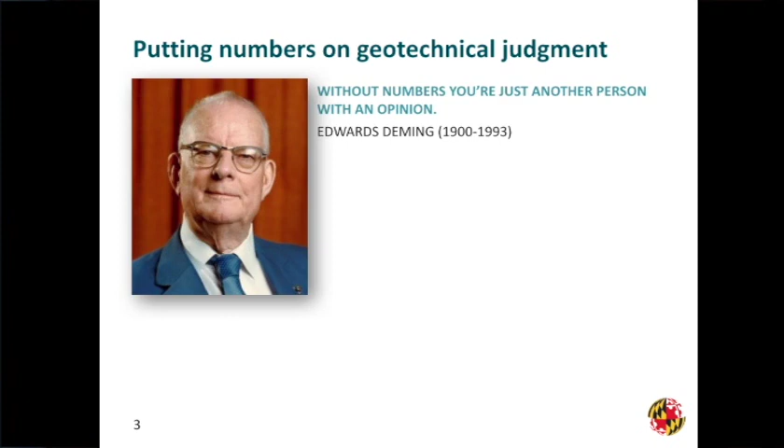It sort of led me to think about this topic. And when I think about engineering judgment, and it's the miracle of engineering judgment in our profession, most people talk about it qualitatively. But I love this quote from Edwards Deming: without numbers, you're just another person with an opinion. So my question this afternoon is, if we're going to put numbers on engineering judgment, how do we do it? How good are we at doing it? We've been trying to do this for about 50 years now, which is kind of astonishing, but we have. The question is, have we learned anything over this period of time? I'd like to take you through a series of little case history vignettes to make a few points, and I hope they will be of interest to you. I hope they'll be, in some cases, humorous, but also little nuggets to crystallize your thinking about this undertaking.

So, dam safety - many people in this room have been involved in dam safety. Rudy has, I have, a number of others. I like these quotes - this is from the IPCC, the Intergovernmental Panel on Climate Change. This is the UN-sponsored group that's been working on climate change modeling, and they come out with these sorts of statements. This is an Associated Press quote: they say that we can now say with extreme confidence that something, something, something. We can now call it extremely likely that something, something, something.

What do these terms mean? What does extremely likely mean? I was sitting this morning in the restaurant reading that greatest of all American newspapers, and it was talking about probability in jurisprudence - the question of admissibility of evidence and whether it had a likely probability of changing the verdict. What's a likely probability mean?

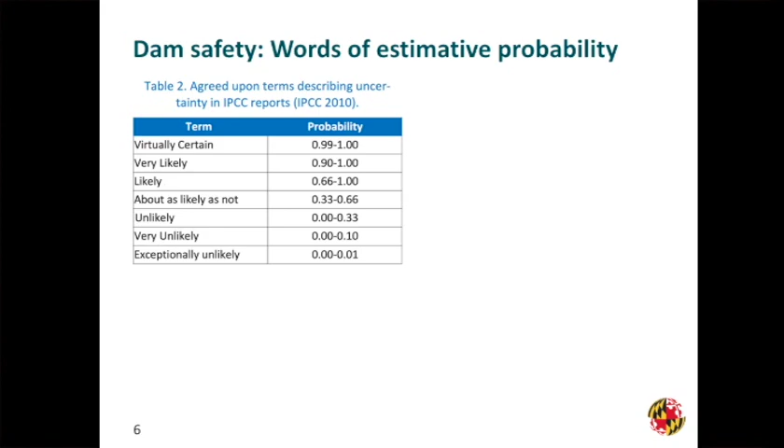Well, take a look at the first one, virtually certain. It's only an order of magnitude different, right? What's an order of magnitude among friends? But the Corps uses this as a sort of starting point.

These words come actually from this guy, Sherman Kent, who's relatively famous in the subjective probability business. He was a member of the OSS during the war, a professor of history at Yale after the war, and then the sort of senior intellect at the CIA for decades afterwards. Kind of makes you feel humble in your accomplishments.

He, for years, pushed the CIA and its intelligence analysts to not use adjectives but to use numbers when advising the president, or in the morning intelligence briefing they give to the cabinet and the president. This was only sort of successful - the agency analysts never really picked this up a lot. But in preparing this lecture, I noticed that as recently as 2015, the Office of the Director of National Intelligence, the DNI in Washington speak, issued an update to these words of estimative probability. So presumably the CIA is still following this direction.

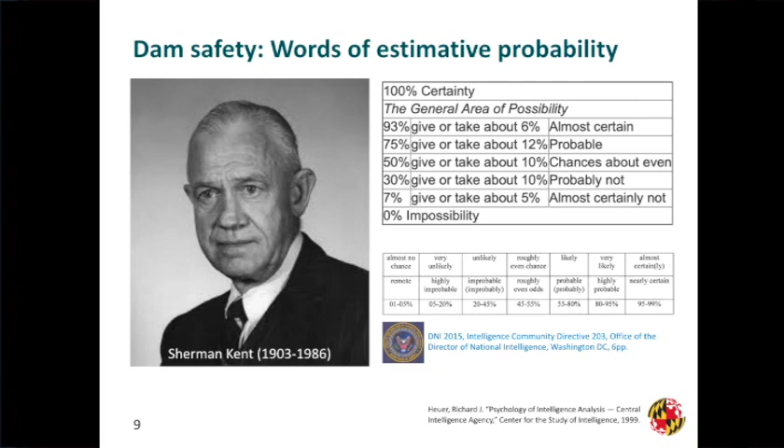Here is an interesting plot, and this has been replicated many times. This comes from the New England Journal of Medicine, but there have been a bunch of others. The vertical axis shows various adjectives and some adverbs describing the likelihood of events, and along the horizontal axis are the corresponding probabilities. There's a general trend, and if you read through the words, it sort of makes sense that they'd have this increasing trend.

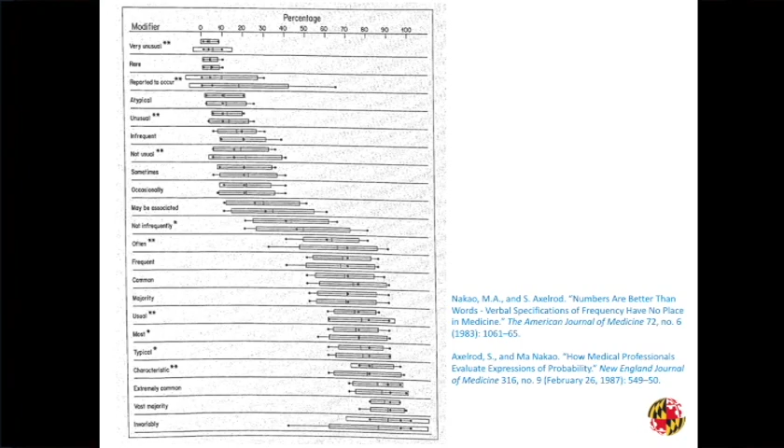What is more noteworthy, though, are the big black bars - those are plus or minus one standard deviation from the median, and the dots are the ranges. You can see that for some of these terms, there are 30, 40% differences in what people mean by them. It turns out most of us are relatively consistent in how we use these terms, but across different people, we're not consistent at all.

So I've created these blue slides which summarize what I think we've learned from each of these examples. This is the example from dam safety. You probably know the Gary Larson cartoon over there, but this is such an appropriate cartoon for what we've learned about words of estimative probabilities.

The adjectives are really poor substitutes for numbers - that's the first thing we've learned. They mean different things to different people, sometimes quite different. They mean different things to the same people in different situations. They mean different things to experts and to other stakeholders. And they mean different things to dogs and to dog owners. We also learned that we should avoid what's called, the term of art, weasel words - and these are they.

It turns out that these words tend to add more confusion to communication than they add clarity. So in our presentations and reports, we should tend to avoid these kinds of words because they may cause more problems than they solve. So that's what we've learned about WEPs.

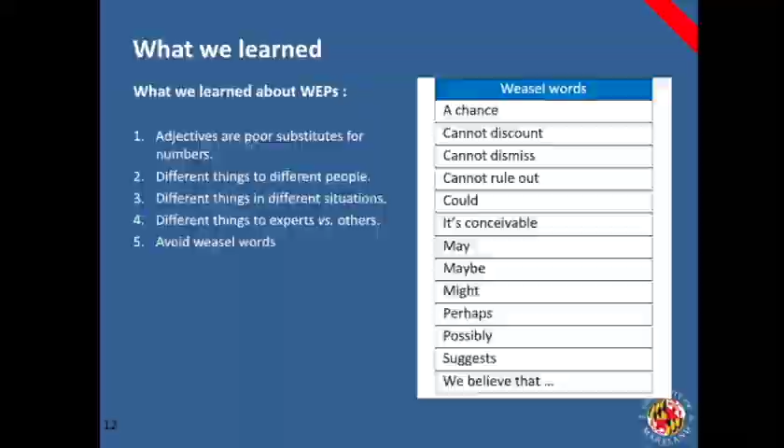Let me go back in history to the late 1970s. I was a young professor at MIT in those days. I called this primal guessing because it was a project that involved Bob Whitman, Allen Marr, and Mishak Yegian, who is at Northeastern University. Jean-Louis knows this as the origin of what we would call FN charts, but he calls them bubble charts. This was an interesting project, and we learned really a lot from it.

This is the Tonen refinery and tank farm in Kawasaki Bay in Tokyo. Those tanks are really big. I guess we're in Texas, so everything's big, but those tanks are really big. They're 50,000 kiloliters. That's about, I did a calculation last night, enough oil to flood a soccer field 10 meters deep. So they're big.

Around each one of those patios is a firewall in case they leak, and between the patios are underground drainages in case there's not enough capacity. And around the entire site, you can see some ships docked over there, there's a big revetment, which is also a fire retaining wall. So it's a big systems problem.

The issue is if they lose oil off this site, at the time, 1980-ish, they feared that the Japanese government would fine them about $1 billion in 1980 dollars. And the problem was this 10-meter thick layer of hydraulically placed loose sand, which was thought to be relatively susceptible to liquefaction. This is Tokyo.

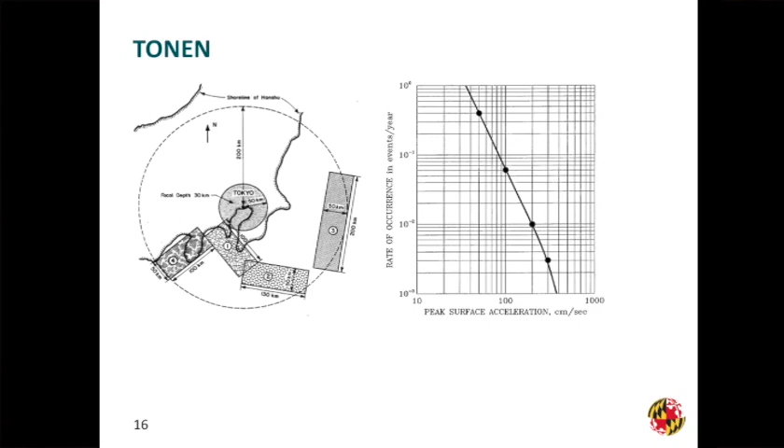But then we were faced with all this stuff that could go wrong. Also down the hall from us in the other direction was Norm Rasmussen. The name may mean something to some people. Norm has now passed away, but he was the director of the WASH 1400 study, the Nuclear Regulatory Commission probabilistic risk assessment of nuclear plants. A bunch of their graduate students were in our classes, and so we stole their idea about using event trees to model the different things that could go wrong at this tank farm.

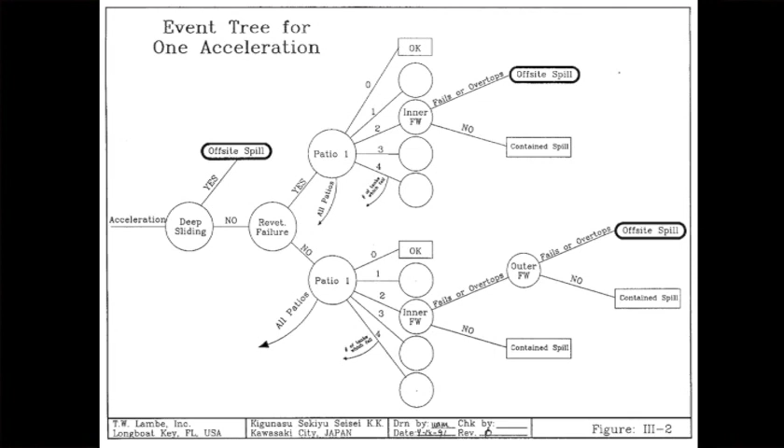This is one of the patios, with those 4 big tanks in it. We created event trees like that for all the patios, and eventually the thing kept getting bigger and bigger and got a little bit out of control. But this allowed us to not worry about trying to put numbers on what could happen to the whole site, but rather to, like engineers do, break it up into little pieces, put numbers on the little pieces, and then combine them in a logically consistent way. So that's what we did.

There were a whole bunch of uncertainties in all the pieces of this analysis, and we tried to break them all out. We'd sit around the table, the 4 or 5 of us, Bob Whitman, Alan, me, Mishak, and sometimes Bill Lambe and some other people, and we tried to argue with ourselves, thinking slowly, which has now also become a term of art, about where these uncertainties were coming from and how big they were, trying to negotiate a consensus among us on what these numbers might be, because we didn't have enough data to actually do these things in a traditionally objective statistical way.

25 years later comes Katrina, and some of the people on this project are known to you. Marty McCann's known to many of you. Bob Patev is still very active in the Corps. The issue there was what were the risks in reconstructing what was then called the Hurricane Protection System for Louisiana.

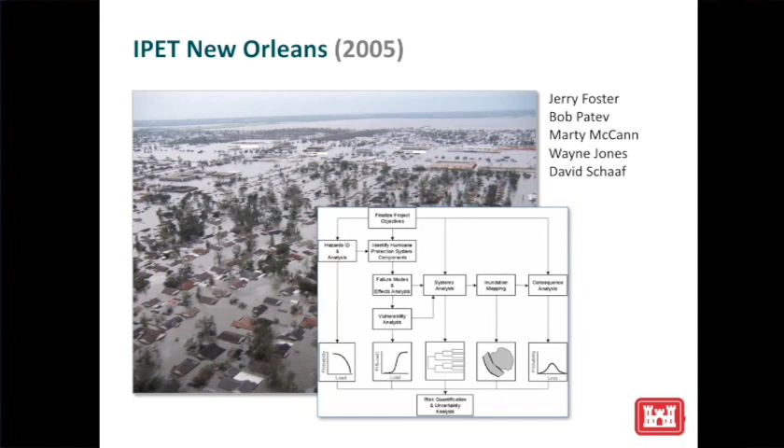It was the same kind of problem, and we thought we'd apply the same kind of methods. 20 years later, the models are more complicated. They're more systems engineering models. The uncertainties are pretty much the same, and we used pretty much the same approach of slow thinking, consensus, breaking the problem up, and deciding as a group what numbers we were going to put on these various parameters. Again, there just weren't enough data to put numbers that were totally objective.

So here's some lessons I think we learned from these two cases, especially from the Tonin case. The really important uncertainties, in my view, that we deal with in geotechnical engineering have nothing to do with randomness in nature. They have everything to do with what we don't know. The uncertainties are epistemic. They are not aleatory.

Secondly, I'm going to say this again later. The statistics that we all learned in college are totally useless. And that's fine, because none of us remember the statistics we learned in college anyway. That's intended to get a laugh, but I truly believe it.

The statistics we all learned in college are sampling statistics. They're frequentist statistics. They deal with uncertainties, variabilities in the world. And that's not what we geotechnical engineers deal with. We mostly deal with how much do we know about something. We deal with epistemic uncertainties.

I've said before, and some of you have probably heard me say this, that in my experience, hydrologists, H&H people, hydrotechs, are all frequentists. They believe the world is random and we can use statistics to estimate it. Geotechs, in my view, are all Bayesians. They all believe in degree of belief probability, and uncertainty is in what we don't know about the world. And structural people usually don't care as long as the design meets code.

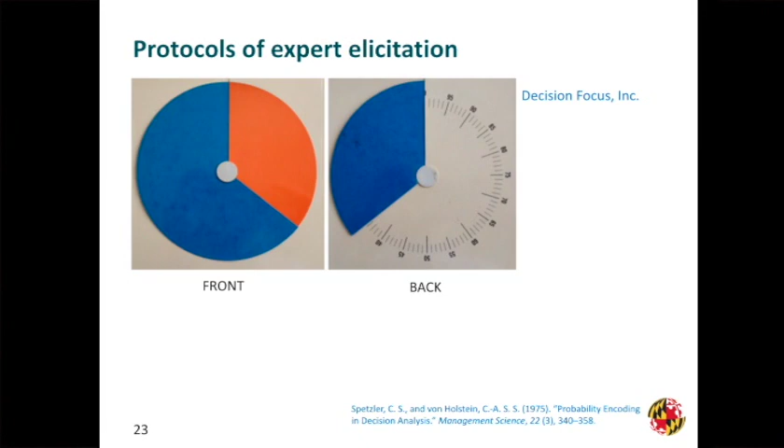This is some work done by Bill Roberds, who was one of our students years ago at MIT, one of Herbert Einstein's students. He works for Golders, and Golders has done a lot of risk analysis, especially in surface mining, in the oil and gas industry, and in hazardous waste and other things.

So this is an example from some years ago for FHWA where they used these spinning wheels, these probability wheels, to estimate various exceedance probabilities for the large-scale friction angle of a rock slope, and got their experts to estimate these exceedance probabilities in a variety of ways, and then at the end of the day could sketch a cumulative probability function through them.

So this way of using formal processes and asking people what they would do in certain uncertain situations seems to work actually reasonably well, and experienced statistical research tends to suggest that the numbers are actually relatively well calibrated when you do things slowly using process.

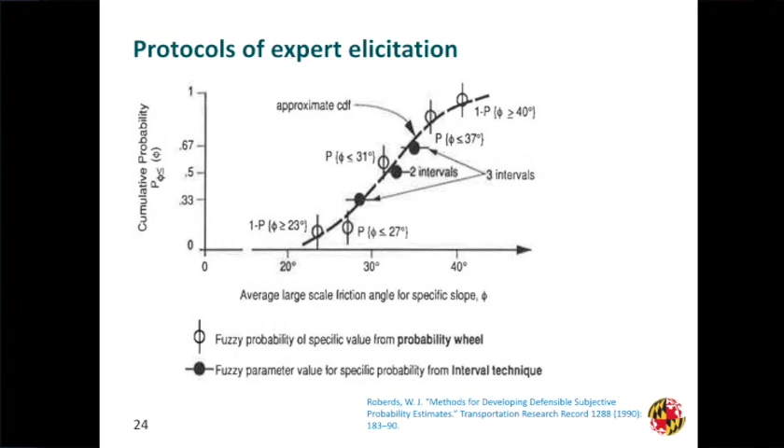Needless to say, there are any number of software vendors who would be delighted to sell you interactive web-based software systems to do this, and some of them are actually relatively good. We use a bunch of them around the university. There's a citation at the bottom if you want to track that one down.

And there's also this other issue, which is a relatively big one, which is if I have a group of experts and they all tell me slightly different numbers, how do I aggregate those into a single distribution? There's basically two ways to do this. One is a sort of mathematical weighted sum kind of way.

That's one that's been supported and argued by Robin Cooke and a lot of the continental people who do this for things like dam safety and climate change policy. The other approach, mostly argued by Tony O'Hagan at the University of Sheffield in the UK, is to use group consensus, discussion, interaction, and negotiation to reach a consensus.

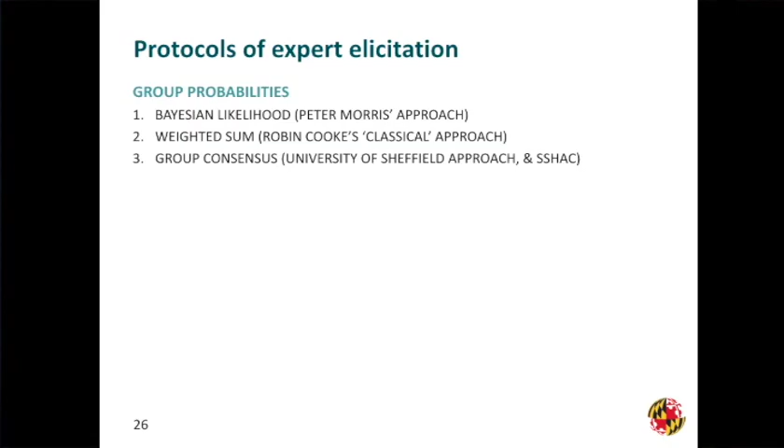SSHAC, the Senior Seismic Hazard Analysis Committee, was a USNRC project some years ago to try to develop a group consensus means of estimating seismic hazard for power plants. It uses this same consensus approach, and that is very much, in our practice, what seems to work better. We seem to get better calibrated, more thoughtful group probabilities by using discussion and consensus than using the more mathematical approaches—much to the chagrin of many of my more mathematical graduate students.

That's Frank Plimpton Ramsey. Ramsey axiomized subjective probability. He was a student of John Maynard Keynes. He invented the whole theory of discount rates in public policy. He was the doctoral advisor for Wittgenstein, and he died at 26. Really, it's another one of these humbling biographies that makes you wonder what I've been doing all my life.

As that old saying goes, when he was my age, he'd been dead for 45 years.

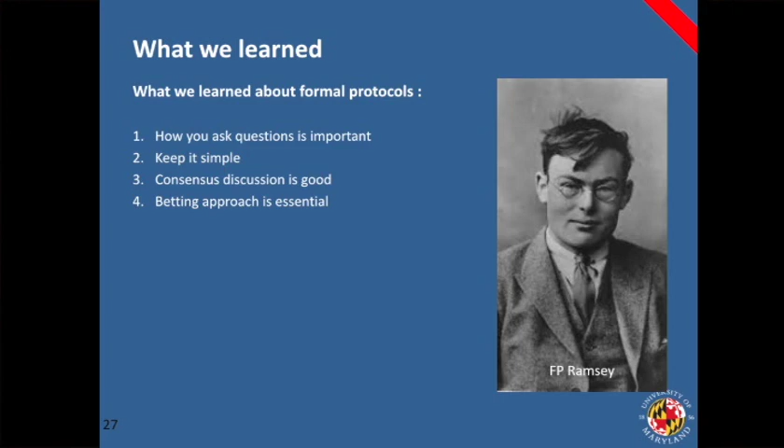Some things we learned: how you ask questions is important, keeping it simple is important if you want to get calibrated results, consensus and discussion gives you better calibration than just trying to mathematically aggregate, and some kind of formal betting or similar approach is really essential to getting well-calibrated numbers. I'm going to come back to that in just a slide or two.

Okay, so far we've had some experience at trying to do this. We know from research on a number of different fields that more formal approaches tend to give you better numbers than informal, just asking the expert approaches. But when you try to use all these good procedures, how good are experts and how well calibrated are they? Are the numbers that experts give us, can we take them to the bank?

Are they good enough to make decisions on the basis of? This is a topic for a several-hour lecture all in itself, and I'm not even going to attempt to go there. We know from broad experimental work that all of us, people, are systematically biased in the way we associate numbers with uncertainty. It seems to be part of being a human. And there are several here that pop up in geotechnical practice all the time.

The first one is that we are all wildly overconfident. Something I always do in my graduate risk class is I ask the class to estimate some number that they have no way of knowing. So I always ask them something like, estimate how many ships transited the Panama Canal last year. Now, we've worked there for several years, so I happen to know that number. None of the class is going to know that number.

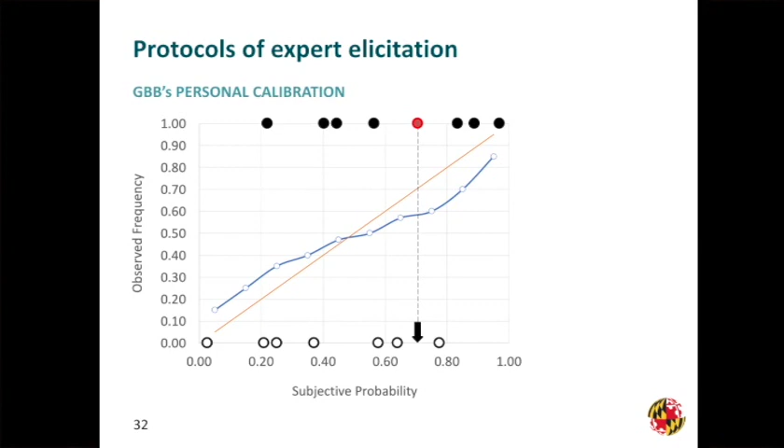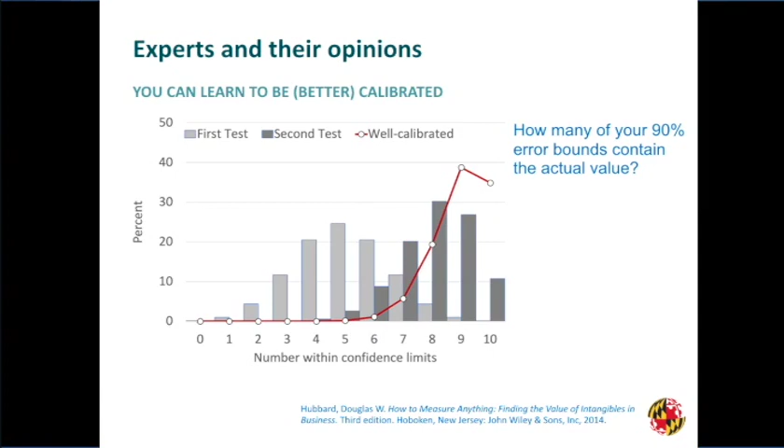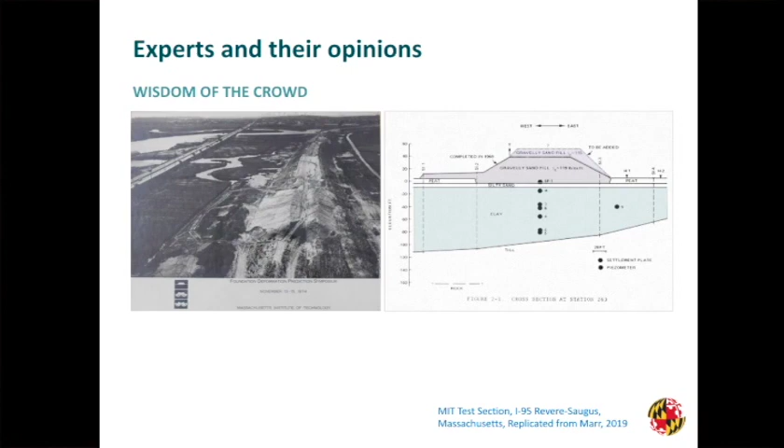He got 6 teams of experts from Berkeley, Imperial, Illinois, and other places. He gave them all the data they wanted and had them estimate the added height of fill until the embankment failed. They did, and he got them all to come to Cambridge and present their results. Meanwhile, in the intervening months, Alan, Bill, and that whole crowd had loaded the thing up to failure, and it failed. They had the data, which was kept secret, and presented it at the end of the conference. So here are some interesting plots.

This is something that's been replicated a lot. There is wisdom, quote, wisdom in crowds, that when you get a bunch of people together to estimate numbers, their errors tend to balance out. Some people make one kind of error, some make another kind, and those errors balance out. So there is wisdom in crowds, and usually a group of people is more calibrated than any one of the individuals within that group.

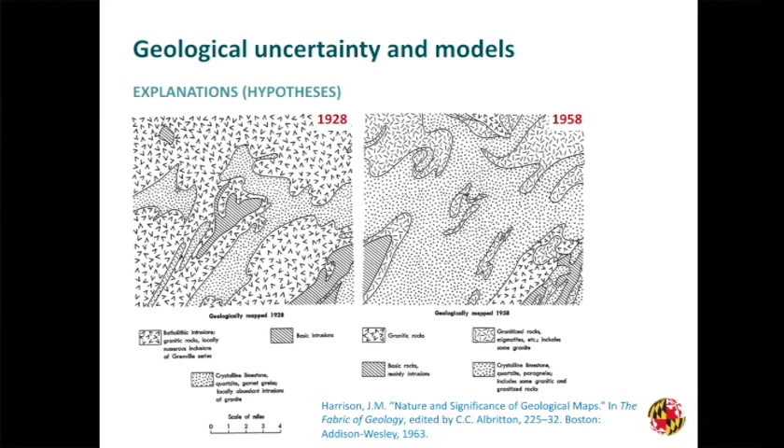Everyone in the audience says, oh yeah, that seems reasonable. It is reasonable. But that means we can't just use the statistics of data to draw some of these kinds of conclusions, because theory is hugely important in geological interpretation.

And this has been replicated many times. The really famous guy who replicated this is Robyn Dawes from Michigan, who published a paper also in clinical medicine called 'The Robust Beauty of Improper Linear Models.' This seems to be really well documented too. Simple models perform much better - we don't want to hear this as professionals - better than our raw professional judgment does.

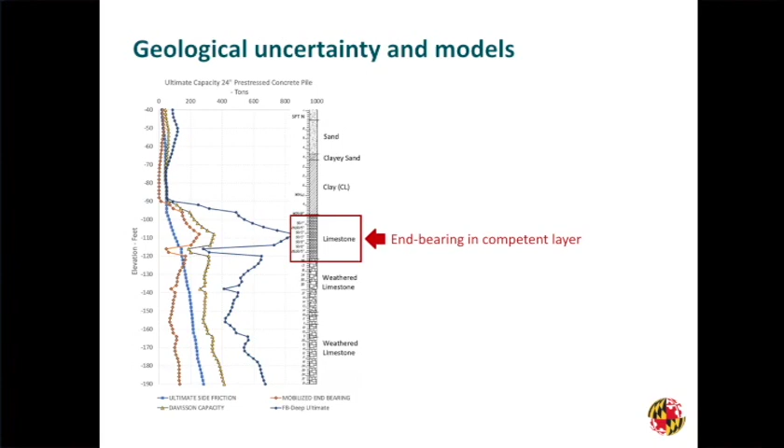So what's going on? What it looks like, from a geological point of view, is that some of the piles do bear up - in fact, most of them bear up where you hope they're going to. But some of them, due to the spatial variation of those limestone strata, or due to the energy of the pile driving, or who knows what, punch through that layer. If they punch through, there's almost no tip resistance - they become friction piles. Those friction piles get driven twice as long until they bear up. Some of these really long ones, we think, hit some kind of old karst feature infilled with maybe under-consolidated materials, and they never did bear up - you can drive those forever.

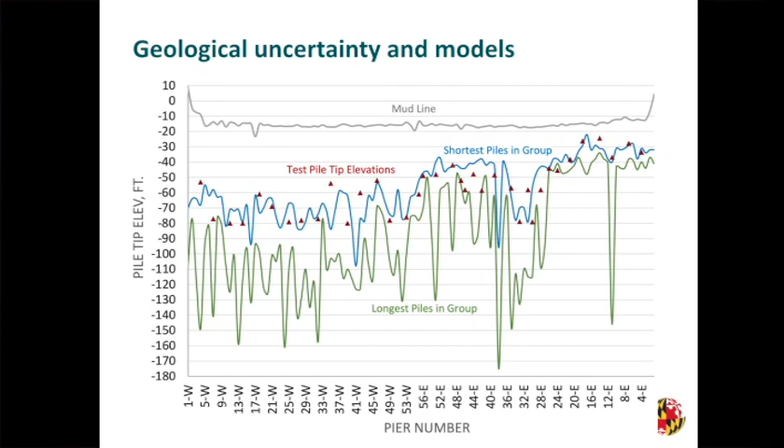So how do you make an estimate - they're building a new bridge now - of the uncertainty in the pile lengths and the pile costs, and in ordering the precast piles for the new bridge? We thought it would be good to go back and try to build a model for this, and then put our judgment on the model. Here's what we found: those sets of 10 or 12 piles are all the end-bearing ones.

Those are the ones that set up just like expected. They're about the same length as the test piles. There were a bunch that punched through, and they were much, much longer. They became friction piles. And then there's a small number that never did bear up.

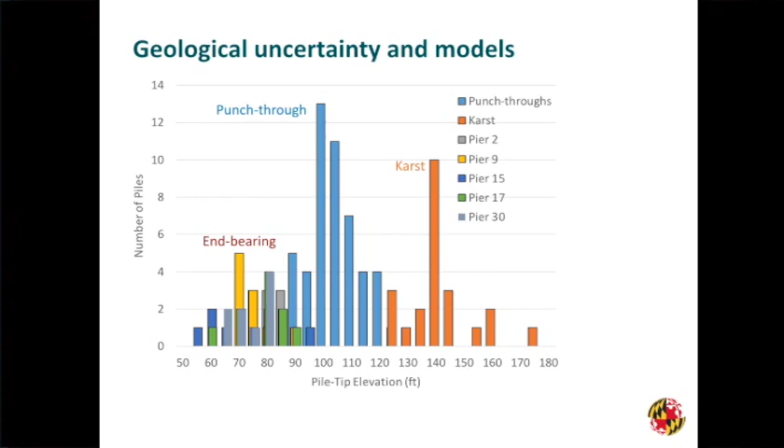We associate that with karst, but who knows what the true thing is. So we came up with this little model, and this says that instead of trying to estimate this crazy, very skewed distribution of how long the piles might be, you can divide it up into 3 different kinds of piles, and then base your estimates on the model of the geology. We think you can get a better estimate by doing that.

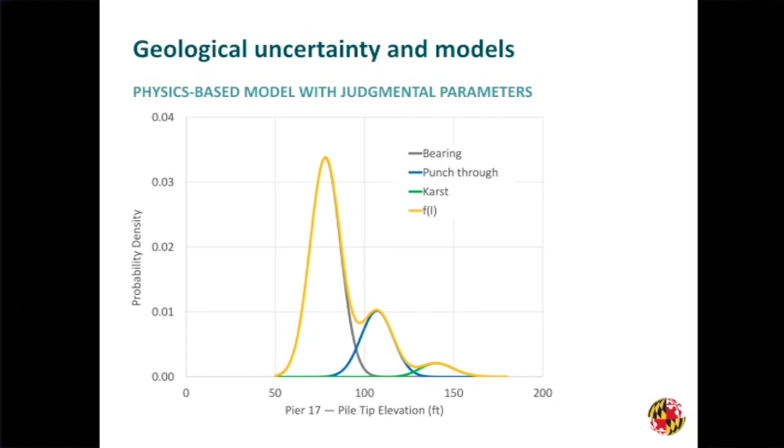So, jury's still out. This project is still going on, but here we tried to use a physics-based model of the geology combined with engineering judgment parameters.

All right, so let's just wrap up. What we learned about geology, and this goes back some time, is that geological data, according to me, don't speak for themselves. They need to be interpreted, and we use engineering judgment most effectively to adjust the geological model rather than just to intuitively make guesses at how much variability there might be.

Well, there is a paper on this. I kind of got carried away this summer. This you can write forever. The paper ended up to be like a monograph. It's on the Civil Engineering Department website under my faculty name. If you want to get a copy of it, you can just download it. It goes into a whole lot of other topics.

But just to sum up, here's what I think we've learned from 50 years of trying to put numbers on judgment. If you want to get numbers that are solid and well calibrated in the sense I've talked about, you've got to take the whole process seriously. Just getting a bunch of experts in a room and asking them their probabilities is, in my opinion, doomed to failure.

It's a process, and just associating words with these numbers is a very poor substitute for taking the process seriously. All of us in this room are subject to systematic cognitive biases in the way we put numbers on uncertainties, and there's been years of research on this topic. The more we can understand those systematic biases, the more calibrated we will be in putting numbers on uncertainties.

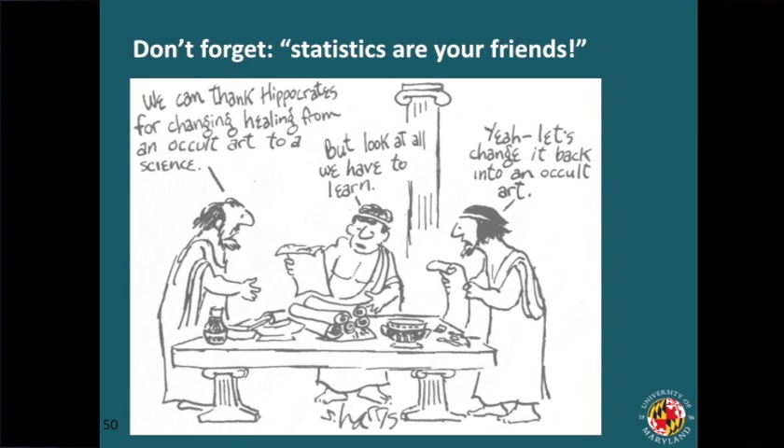Probably bad advice. So, thank you very much.

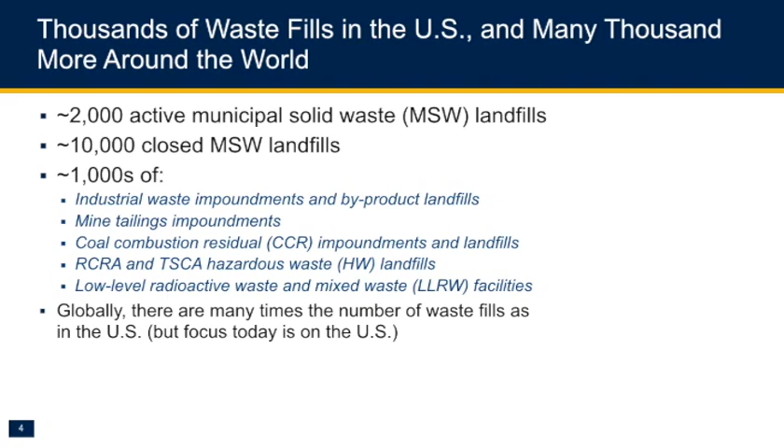So why is this topic important or of interest? Well, the reason is there are many facilities in the country and around the world, and the consequences of failure can be significant. There are more than 2,000 active municipal solid waste landfills in the U.S. alone, thousands of closed facilities, many coal combustion residual impoundments, mine tailing impoundments, hazardous waste landfills, radioactive waste disposal facilities, and many times that number around the world. The consequences of an unstable waste fill can be significant in terms of risk to loss of life, property, and environmental contamination.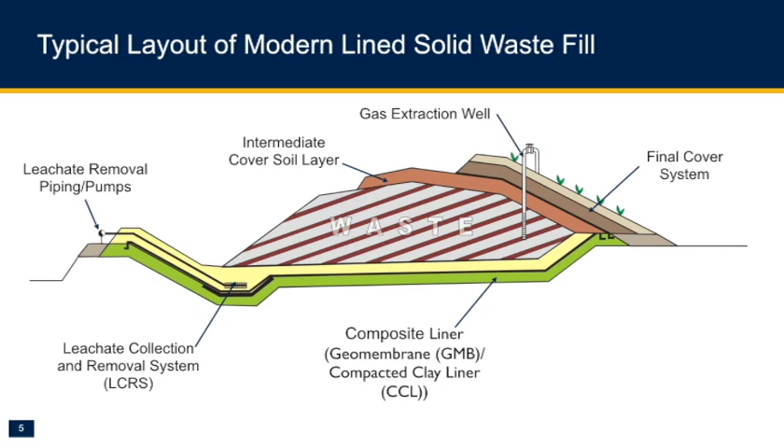Geotechnical design engineers involved in these facilities must be cognizant of multiple static and seismic failure modes that can exist at each stage of development of the project. These include sliding through the waste mass itself, sliding through the waste mass and along liner system interfaces, sliding through the waste mass and the foundation soils, stability concerns with berms and dikes around the perimeter of the facility, and veneer stability failure, sliding at the interfaces of the liner system and the final cover system. Today I'm just going to be talking about failure modes that involve sliding and movement through the waste mass itself. There's lots of information in the literature, lots of case studies about veneer failures, which tend to be fairly common.

So where did we start?

As I said, we go back to the 1980s when EPA promulgated regulations for municipal and hazardous waste disposal facilities. Those regulations caused the cost of these facilities to go way up with the need for liner systems, cover systems, and all of those kinds of things. Facilities got bigger, taller, slopes got steeper, and so slope stability became a bigger concern. There were a number of notable failures during that time, a few of which are listed here. What I'd like to do is highlight three of them and see some of the lessons we learned from these failures during the relatively early period of modern facilities.

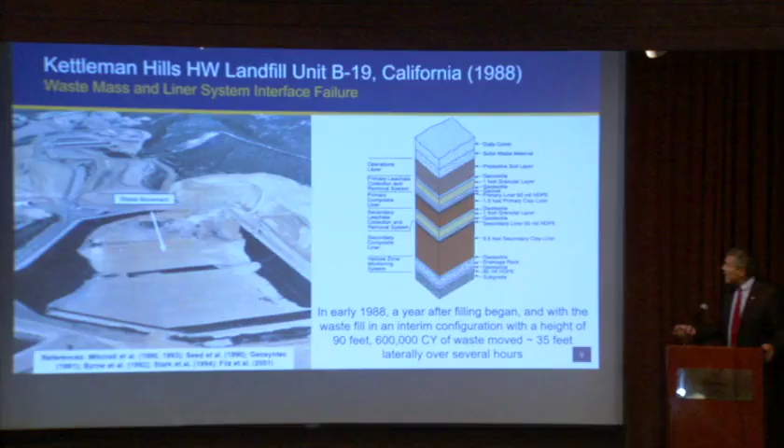The first such facility is the Kettleman Hills hazardous waste landfill failure in California in 1988. This involved a waste mass and liner system interface failure mechanism. What we see in the photograph here is the facility. This is the cell that failed. It's bowl-shaped with an open end at the bottom here. And here we see the waste mass in an aerial photograph shortly after failure, in the direction of failure towards the open end of the cell.

This is the liner system that underlaid the cell. It's a double composite liner. It was perhaps the most sophisticated liner system that had ever been constructed up to that point in time, by a well-known and well-regarded engineering company. It included a secondary clay liner, 3.5 feet thick, very low permeability, overlain by a geomembrane, then a drainage layer they called the secondary leachate collection and removal system, and then a primary clay liner and overlying geomembrane, and a primary leachate collection and removal system and various other layers. So quite thick, probably 8 or 9 feet in total, with lots of interfaces between different materials, one of the most sophisticated and most engineered liner systems designed and constructed to that point in time.

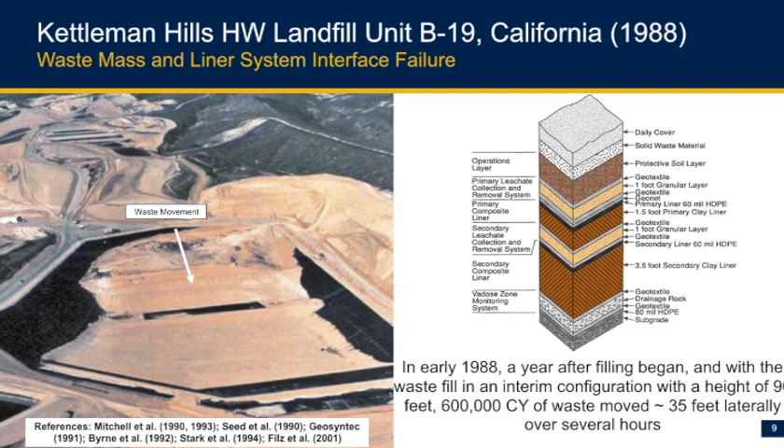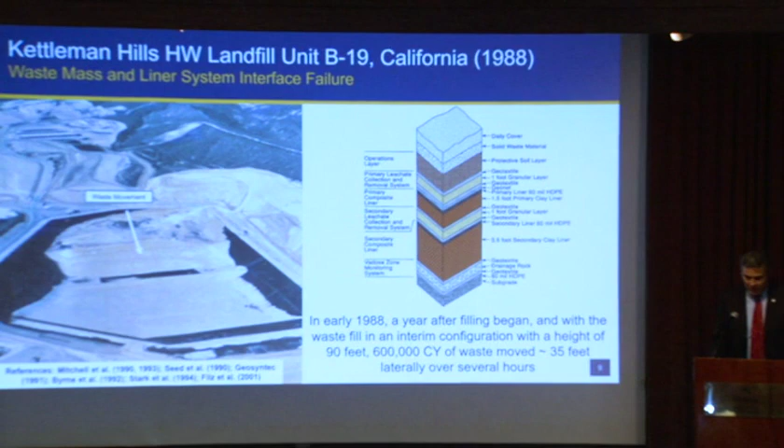About a year into operations, in early 1988, after a year of filling, this waste mass failed by sliding in this direction about 35 feet. The question is, why did it fail? It moved a large distance over a period of several hours. We got involved in the forensic investigation of this facility, and through that found that the mechanism for movement was sliding along liner system interfaces.

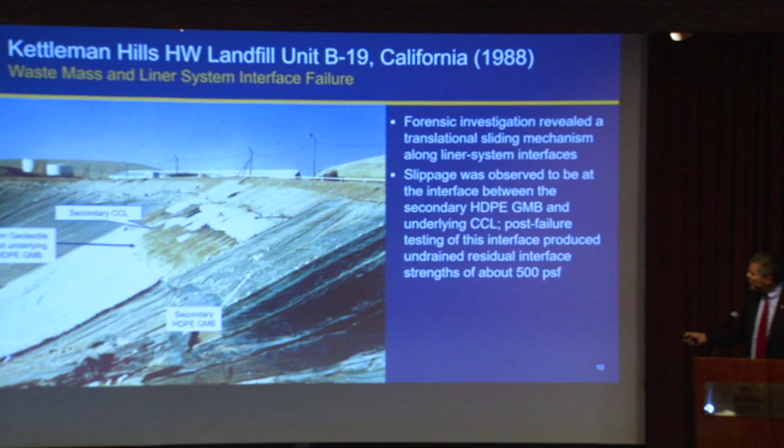Slippage was observed to be at the interface between the secondary high-density polyethylene geomembrane and the secondary compacted clay liner, and you can see that here. This is an area where the waste has been excavated. This is the secondary compacted clay liner. The second geomembrane is being hidden by this geotextile, but it's right under the white geotextile. So sliding occurred at that interface. For scale, you can see a worker standing just above the area that tore. So a pretty large area of liner.

Interface testing, direct shear testing conducted after the failure, showed that the residual shear strength between the secondary clay and high-density polyethylene geomembrane was very low, on the order of about 500 pounds per square foot. Testing also showed that the geosynthetic interfaces were very, very weak, with interface friction angles typically less than 10 degrees. At that time we understood interface behavior was important, but people hadn't realized the strengths of these interfaces could be as low as they turned out to be.

3D effects were also found to be important, as was progressive failure of the system. As I said, interface testing was conducted. This just illustrates two sets of test results from that time, for geosynthetic and geomembrane-clay interfaces. The important point is that for both interfaces, the peak shearing resistance occurs at a movement of only about 0.1 inches, and after the peak strength is obtained, there's a large drop-off in strength, so it's a strain-softening type of material.

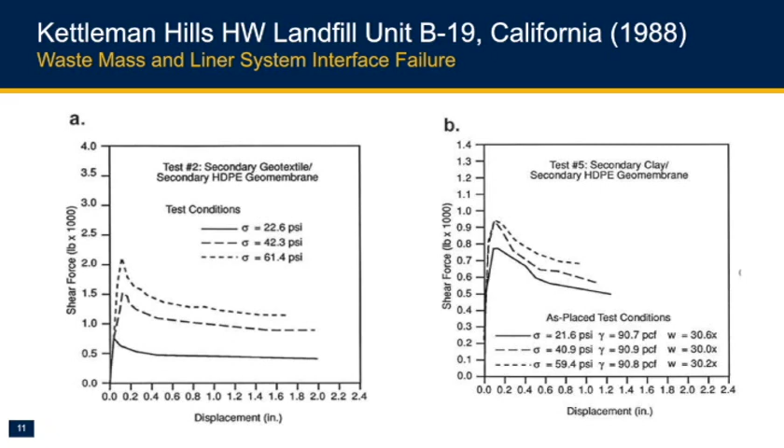So if you think about building this massive facility, placing these different geosynthetics and clay liners on a slope, and doing it without getting more than 0.1 inch of movement at the interfaces during construction, you can see it's almost an impossible task. This led us to understand that residual strengths in these kinds of systems, under large displacement conditions, are really quite important.

So what were some of the lessons from this first case study? First, that many liner system interfaces are weak and exhibit pronounced shear softening, with residual strengths much lower than peak strength. Secondly, liner system construction and waste placement can and will typically induce movements that result in post-peak shearing conditions, leading to progressive failure of these slopes if not adequately accounted for in design.

Waste mass stability evaluations need to be conducted at each stage of facility development. This failure occurred at an interim waste condition, not a final waste condition. Given that many of these structures have many interim conditions over a period of a decade or more, it's important to understand that development sequence and evaluate it as part of the design.

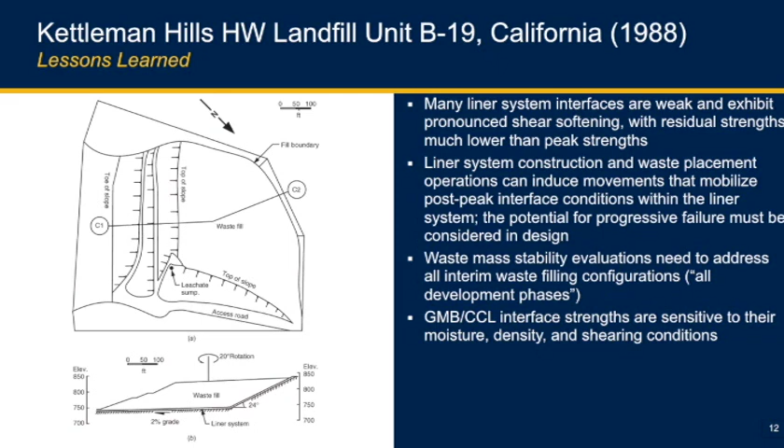Lastly, geomembrane compacted clay liner interface strengths are sensitive to compaction conditions. Just about every type of compaction situation with clay materials, the resulting engineered structure is sensitive to the way it's compacted. This was particularly important here because it created a conundrum.

We like to compact clay liners wet of optimum with kneading compaction and smooth rolling the surfaces to get low permeability for environmental protection. But those precise compaction conditions also result in low interface strengths. So what you want to do for environmental protection runs counter to what you want to do for slope stability. And those things need to be balanced during design.

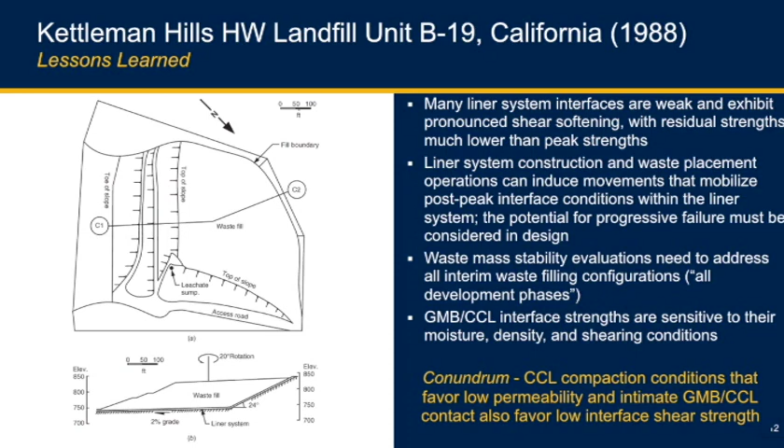Second case study from the early period is in Maine, the Crossroads landfill. This is from 1989. This is a waste mass and foundation soil failure, and we see the failed cell here.

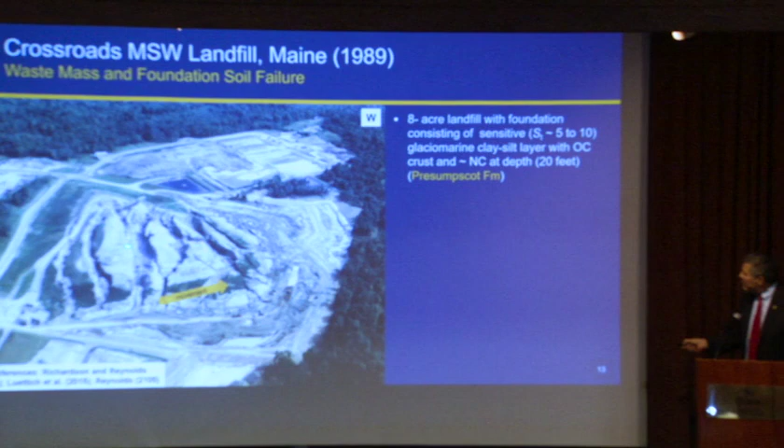What happened is this cell underwent a retrogressive failure starting on the west side of the site. And you can almost see a whole series of slumps, waste blocks, and grabens as you migrate from the west side to the east side.

This cell that you see here is 8 acres in size, and it is sitting on a foundation consisting of a very sensitive glacial-marine clay silt layer that's over-consolidated at the crust, and it transitions into basically a normally consolidated condition at a depth of about 20 feet. This is the Presumpscot Formation for those that might have worked in New England.

The clay silt layer sitting beneath the landfill served as a liner. There was no constructed liner system or leachate collection and removal system. So after about 13 years of operation, with the waste height at about 70 feet, and after a period of heavy rain...

a rapid retrogressive slide occurred involving about 650,000 cubic yards of MSW. So this was a big failure. This was a large failure.

The sliding surface was determined to be in the normally consolidated zone of the clay silt layer, so below the over-consolidated crust. And as a result of the failure, the waste blocks we see in the photograph moved as much as 160 feet from east to west.

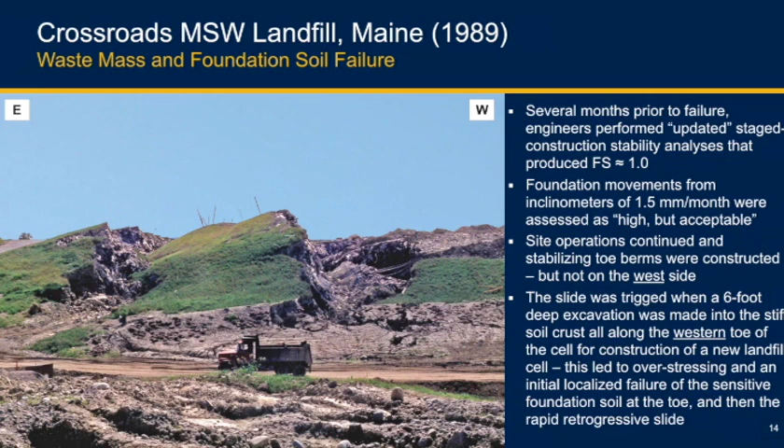Well, what do you think happened to this landfill when they made the excavation? It failed. They unloaded the toe on that side, created very high shear stresses in this very sensitive soil, and it failed at the toe with this rapid retrogression that resulted in the slide morphology that we see here.

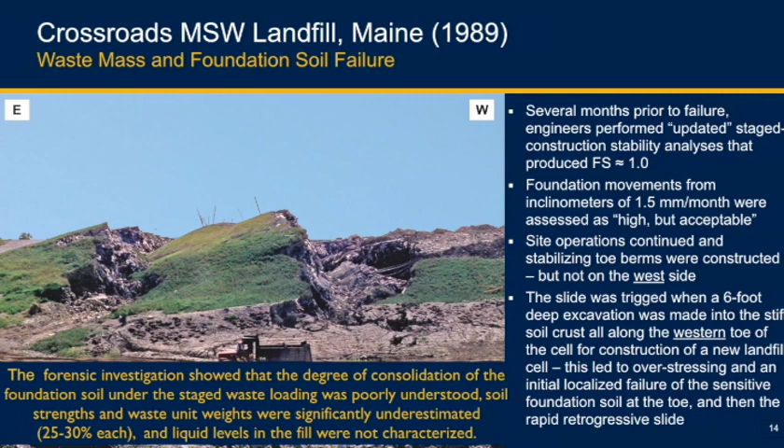This factor of safety of 1 was interesting because what we also found out was they were more or less right with the factor of safety, but for all the wrong reasons. The unit weight of the waste used in the stability analyses was underestimated by something like 25%, so the waste was much heavier than they thought. But on the other hand, they had estimated a shear strength that was much weaker than the actual condition. So things just seemed to fortuitously equal out. But in any event, the landfill failed.

So what were some of the lessons from this case study? Both waste and foundation unit weights and shear strengths must be adequately characterized. I really want to stress waste, because up until this time, people hadn't really paid attention to the need to fully characterize the geotechnical characteristics of waste materials in these kinds of projects.

And that came through loud and clear in this particular project. While I didn't talk about it, the forensic investigation showed that there were elevated liquid levels within the landfill. There was no leachate collection and removal system, and this contributed to the loss, or the lack, of stability of the facility.

Another lesson we learned is that each significant construction activity or change in operations should be considered with respect to its potential impact on stability. In this case, there was an excavation at the toe of the existing landfill, but there was no corresponding evaluation of the stability of the landfill with that excavation in place.

And then clearly, from this, another lesson was a basic one for geotechnical engineering: for soft soil sites where you're loading the sites, the rate of filling needs to be moderated or controlled in concert with the rate of strength increase in the foundation. So this is a classic staged loading geotechnical type of problem and analysis that wasn't adequately characterized in this case.

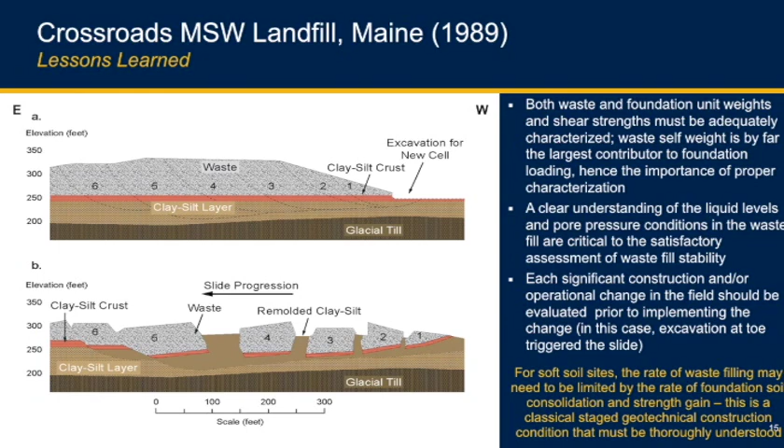The third and final original case study is a waste mass and foundation soil failure in Ohio in 1996. This is the Rumpke landfill, and we see it in the photograph here. This is about a 20-plus acre area. It's a very large cell.

The area that failed is to the south, above this line, which represents the original toe of slope of the landfill. So this is the part that failed. You can see this very large headscarp at the back of the slide, and you can see that the failed material flowed nearly 1,000 feet into this adjacent area. This too was an excavation for a new lined cell. It had very little to do with this failure, but because it was an excavation and at a lower elevation than the failure, it contributed to the run out of this waste over a long distance.

So the story of Rumpke starts in the 1940s when this family started dumping waste into ravines on their property, directly onto an area underlain by clay, colluvial, and residual soils that formed a mantle over bedrock. They really hadn't studied the geology of the area, and they're placing material into these ravines with this soil material filling the ravine. The landfill continued over many years until failure in 1996, and when it failed, the landfill had been filled to grades above what had been permitted. So both the clay material and the overfilling are important parts of the story of this facility.

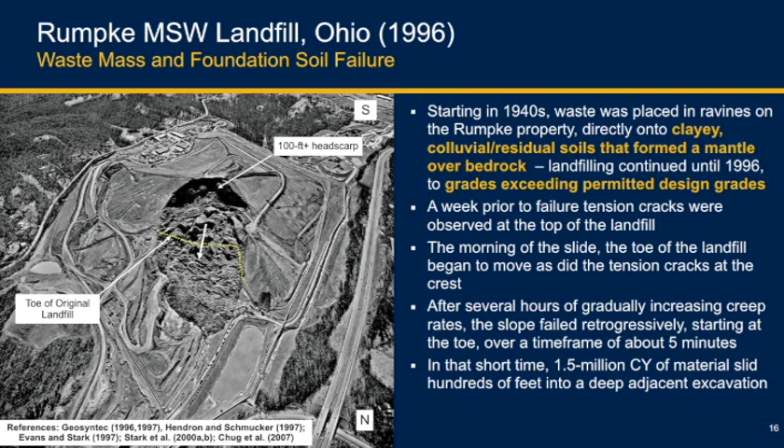So they're going along, filling the cell, and at a certain point in the winter of 1996, about a week prior to the actual failure, the operator started noticing tension cracks up in the fill, and they got concerned that there were going to be problems, so they called their engineers out to the site. They began monitoring the facility carefully, and movements continued to occur throughout the week, resulting, on the day of the failure, in an acceleration of creep rates, opening up of the tension cracks at the crest, and a progression of these activities to a point where failure occurred over a period of about 5 minutes, involving more than 1 million cubic yards, about 1.5 million cubic yards of material. So again, this was a very large failure that occurred over a very short time frame.

Leachate levels in the investigation after the failure were found to be quite high, up to 30 to 40 feet. So that's a lot of liquid pressure acting in the landfill.

Post-failure shear testing of the colluvial soil produced fully softened and residual friction angles of about 20 degrees and 8 degrees respectively. So fairly weak material, particularly in its residual mode.

The analyses we conducted after the failure to help us understand the cause resulted in operative shear strengths, based on two-dimensional slope stability analyses of the material, of about 12 degrees.

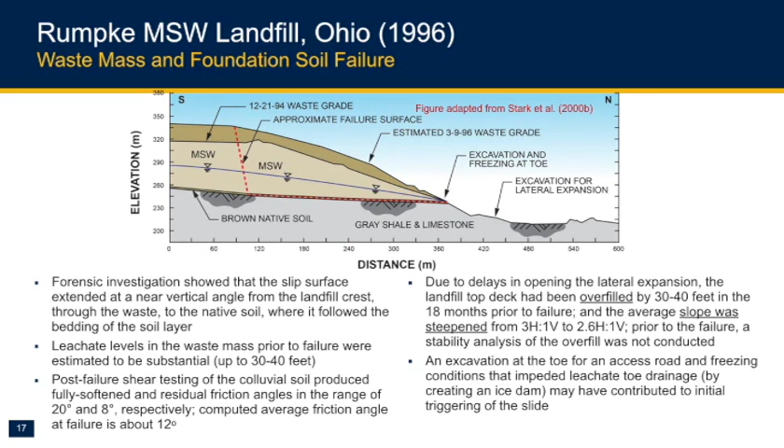So a lot of lessons here. In terms of summarizing the lessons from this case study: foundation conditions for old unlined waste fills must be thoroughly understood if additional filling, excavation, or expansion of the fill is planned.

So I had this landfill, it was filled to grade, and the expansion wasn't ready. What do we do with the waste? We're getting all this waste in, our expansion isn't ready. Well, why don't we just go stack it up on the existing facility - but without real consideration of the potential consequences.

Secondly, there's strain incompatibility between municipal solid waste, which is ductile - if you look at the stress-strain curves for MSW it's quite a ductile material - and colluvial soil, which is quite brittle. This can lead to uneven development of shear resistances, localized shear softening, and progressive failure. And we saw that here.

Leachate buildup in old unlined landfills needs to be carefully considered. It wasn't in this case.

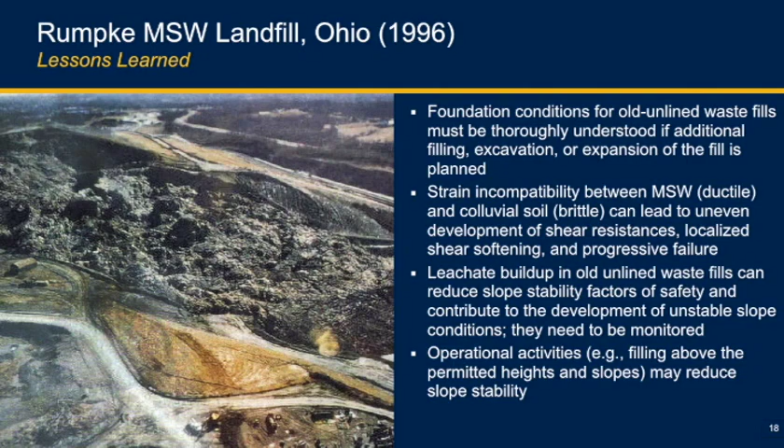And then, just like the last case study - the excavation in the last case study, the cutting of the slope to place a road in this case study - these operational activities at the site may serve as triggers for landfills that are just about on the verge of failure already.

So we quickly went through three case studies, and by the mid-1990s we had learned a lot of lessons. In fact, I was asked in 1995 to write a keynote lecture about the state of the practice for landfill design.

And I remember saying, it comes back to optimism - we knew what we were doing, and we had kind of solved this problem. In hindsight, that was perhaps a bit too optimistic. By that time we had, in fact, learned a lot of lessons. Maybe we learned the lessons, but we didn't learn how to apply them consistently.

And they're listed here. The first and most important one: don't forget fundamental soil mechanics. That applies to a lot of the things that we see. Waste materials have geotechnical properties. Liquid and gas conditions in the fill are important - they can create elevated pore pressures leading to failure.

Soil and geosynthetic interface strengths are really important - you have to understand them, both peak strengths and residual strengths. Mobilized strength compatibility is often an issue. Progressive failure mechanisms must often be considered. Time-dependent stage loading response must be addressed at soft soil sites. These sound like things like building a highway embankment on soft soil - they're not that much different.

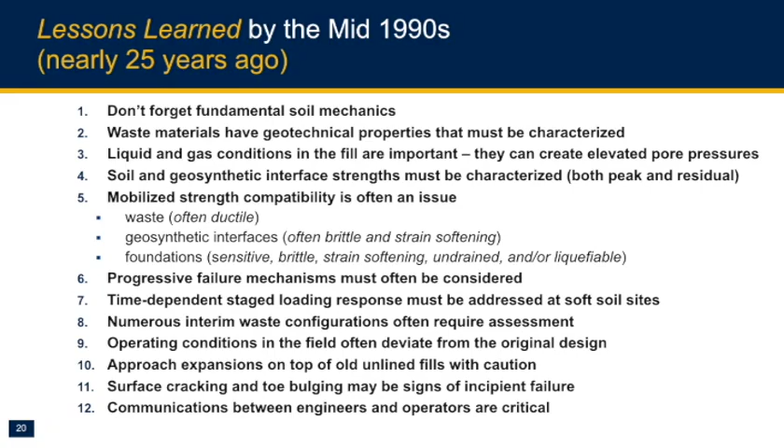Numerous interim waste configurations often require assessment. This may be a little bit more unique to disposal facilities. Operating conditions in the field often deviate from the original design. These facilities may have an operating life of 10, 15, 20 years. You design the facility before you start operations and then don't pay attention for the next 20 years. There's a good chance for something to change and go wrong. Surface cracking and toe bulging may be signs of incipient failure, and communications between engineers and operators are critical, in part because of these long design lives and the potential for things to change as you go along. So again, we learned a lot.

So we're going to get in the time machine. Let's go forward 20, 25, 30 years and see how we're doing. Surely we're doing much better than we did some time ago.

So I titled this section of the talk Continuing Challenges, but could just as easily have titled it, So Why Do We Keep Having These Waste Fill Failures? If we look at the current decade, which we're almost to the end of, waste fill stability failures have continued to occur on a regular basis.

Just the ones I know about, substantial large failures, more than one per year in the United States alone. And you see a lot of these now have confidential next to them, and so we only know about them because we were involved in the forensic investigation. I'm sure Geosyntec was involved in a number of forensic investigations, Golder or someone else may have been involved, and there are additional failures that we're not aware of.

What I'd like to do again is select three that we were involved in and show you a little bit about each of those and what we learned, and then I'll be concluding. But I also want to stop at this point and make a broader point that while I'm only focusing on the US, this is really a very large problem around the world. In fact, in many developing countries, it's a much bigger problem than it is in the United States.

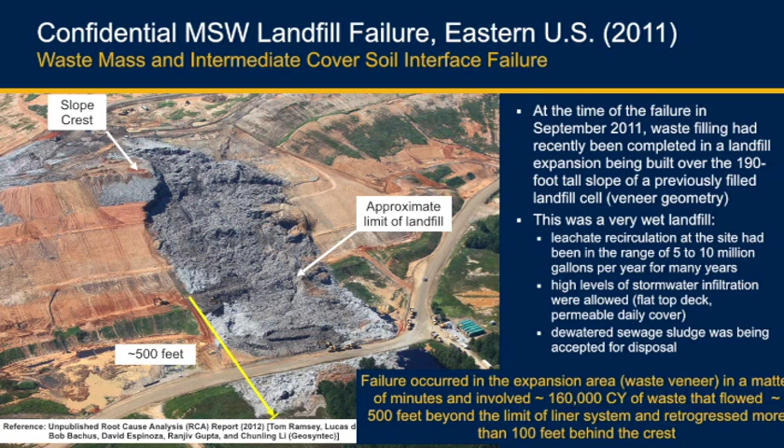The post-failure investigation showed the slip surface was at the interface between the expansion area and the underlying landfill. Before building this expansion, they had put a 2-foot low permeability soil layer—an intermediate cover soil layer, shown in the earlier photograph—over the landfill, then built the expansion on top of it. But they didn't remove that clay layer before placing the expansion against it, and that turns out to be very important.

As part of the forensic investigation, we conducted CPTU soundings around the perimeter of the failed area. All these areas have this same veneer. When we were retained, it was not only to investigate this failure but to help the owner understand whether adjacent areas were at risk, and to develop a remediation plan. So we went out and did CPT testing in these areas after going through a safety assessment with protocols in place.

We found high piezometric levels in these adjacent areas. On-site observations the day after the slide revealed leachate pools and gas vents within the failure area, high liquid pressures, and high gas pressures in the waste. That explains the liquefaction of the material and how far it flowed as it failed, along with clear evidence of leachate overland flow in this area, again indicative of liquefaction.

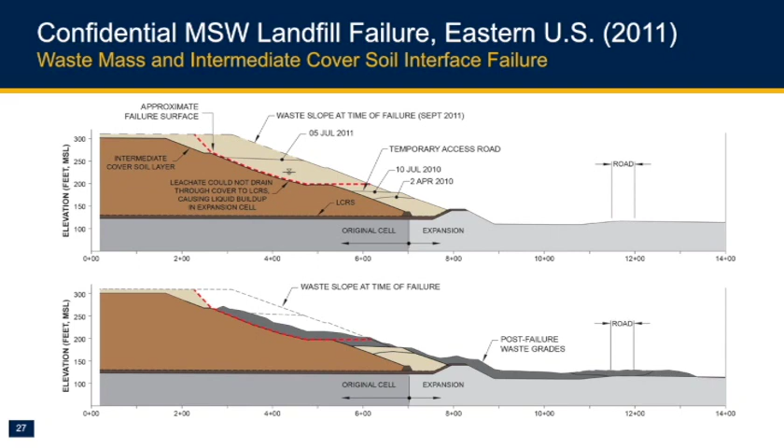We conducted slope stability analyses for this project to better understand the causes of the failure and what happened, using the CPT-derived piezometric levels in those analyses. Based on a factor of safety of 1, we back-calculated a shear strength for the waste characterized by an effective stress friction angle of 26 degrees with very small cohesion.

At the same time, we took samples estimated to be about 75% municipal solid waste and 25% sewage sludge—recall they disposed of that material in the expansion. We sent them to Ed Kavazanjian at Arizona State University, who has an 18-inch diameter direct shear box for testing waste. He built it while at Geosyntec along with Dr. Bob Bachus, and we'd used it on a number of projects. When Ed went to Arizona State, we told him to take it with him, and he did—he's still testing. He performed the tests for us and generated friction angles in the range of 20 to 24 degrees.

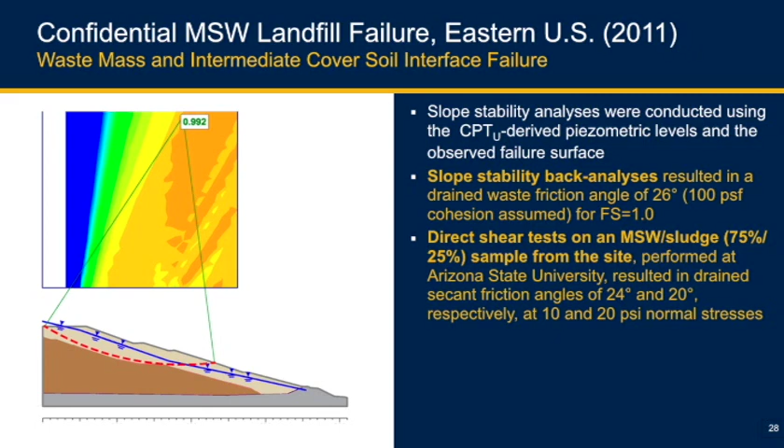Now, what's the significance of that? We consider municipal solid waste to have a typical shear strength characterized by friction angles in the range of 32 to 35, 36 degrees, even at relatively high normal stresses.

So in having these results, it's indicative of a material where the strength has been reduced by the presence of the sewage sludge, and that's probably the dominant thing, and perhaps to some degree by the decomposition of the material that was occurring in this very wet and hot landfill.

So some lessons here. Excessive leachate recirculation and stormwater infiltration can lead to the buildup of elevated liquid levels and pore pressures in the waste.

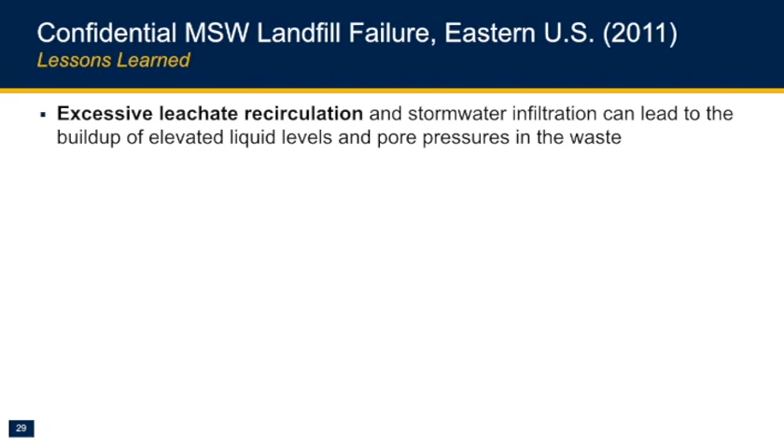Vertical expansions that involve the placement of new waste over old need to account for the interface conditions between the old landfill and the new landfill. In this case, this intermediate low permeability cover soil layer was an impediment to vertical leachate percolation. So the lesson is that in these circumstances, that layer either needs to be removed, as I said before, or a new leachate collection and removal system needs to be installed.

We also, at this time, were becoming increasingly cognizant of the fact that these very wet landfills with leachate recirculation and other things are really poor conductors of gas. So you have this landfill with all this waste biologically degrading, creating lots of landfill gas, methane and CO2, and it can't get to the gas wells, and the gas wells are getting watered out because there's so much water in the facility. So you're building up gas pressures within the landfill, and this is a great challenge as well.

And finally, the effects of sludge on the strength, permeability, and degree of saturation of the waste must be accounted for in design. So a lot of lessons learned with this case study.

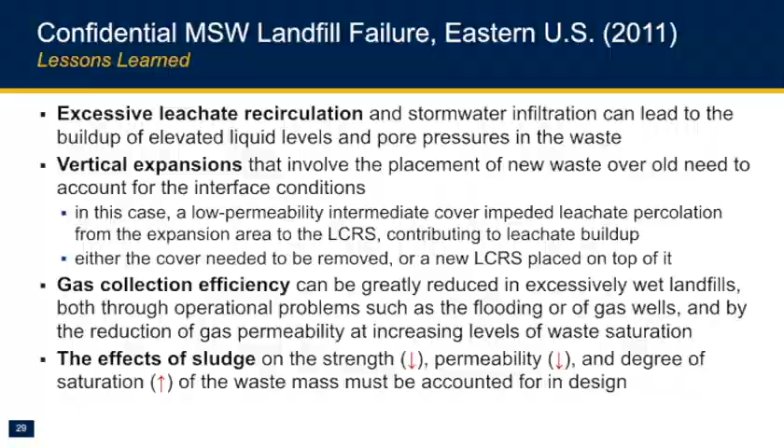This next, more modern one is in the southeastern U.S., and Rodolfo Sancio from our firm, who is here today, played a major role in the evaluation of this facility. This was a waste mass and foundation failure.

We see the slope that failed here. You can get an idea, it's about 90 or 95 feet high at a 4-to-1 inclination, so not remarkable for a landfill slope, not particularly high or steep. You see the back slope and graben that was formed after movement of the slide material.

The story with this one is that this landfill cell was constructed in a deep excavation, roughly 45 to 60 feet deep depending on where you were, into a very highly over-consolidated native fat clay. So they excavated all this material for purposes at the site, using it for cover soil, building berms, and other things. They made this big excavation. This excavation occurred in 1996, and the liner system in this cell wasn't constructed until 2007.

So for a decade, stormwater ponded in the cell bottom. Might that be of interest? We'll see in a minute. So deep excavation, open for a decade, water ponding in the bottom.

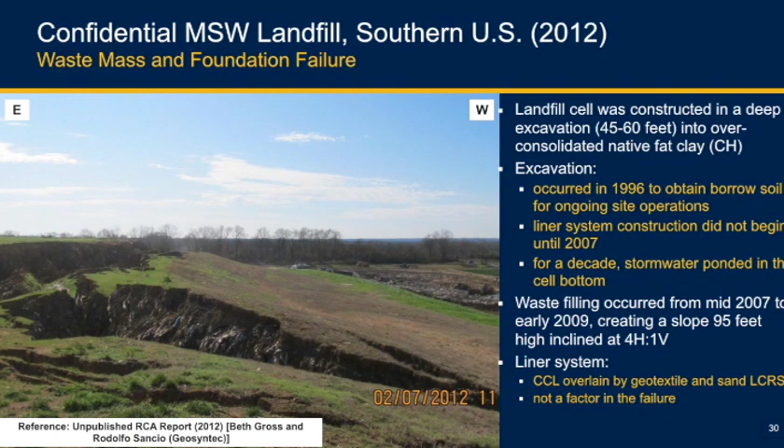Waste filling occurred from mid-2007 to early 2009, creating the slope that we see here. And there was a liner system beneath this facility, but it wasn't involved in the failure, so I'm not going to talk about it. The failure itself involved translational movement that occurred in February 2012 over a period of several days.

So think about this slope just really translating from east to west in this photograph here. And I should point out that on the west side, the excavation extended beyond the toe of slope. So it wasn't like the other side of the excavation was here. There was a soil buttress, but a relatively small buttress to demarcate the end of the cell. It was generally relatively open.

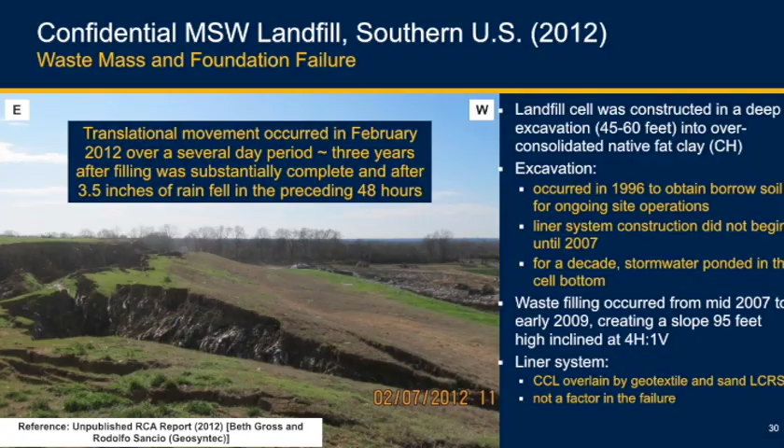And this failure occurred 3 years after filling was substantially complete and after a period of heavy rainfall. But the failure didn't occur immediately after the cell was filled. It sat there for 3 years before it failed. So all this is providing clues as to what happened in this case.

They fill the cracks with more soil, but then the cracks reopen typically after rainfall, and they would refill them again.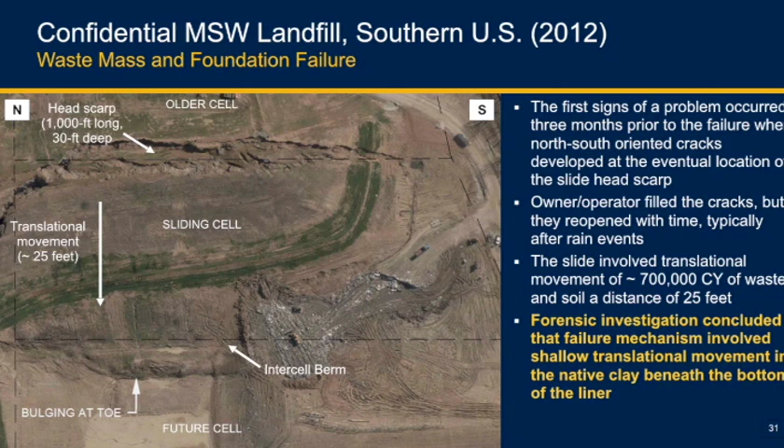The slide involved a translational movement of about 700,000 cubic yards of material, a large volume of waste and soil, a distance of about 25 feet, as we see on the slide. The forensic investigation led by Rodolfo concluded that the failure mechanism involved shallow translational movement in the native clay beneath the bottom of the liner.

I'm going to back up here. So we got involved in this investigation, as I said, and a number of piezometers were installed, a number of slope inclinometers, soil borings were advanced, and Shelby tube samples were obtained.

The piezometers in particular weren't installed until a number of months after the failure, and by and large they were installed outside of the footprint of the failure because the owner was concerned about punching holes through the failed cell. There was a belief based on the nature of the movement that the liner system was still primarily intact, and there was concern that if you start punching many holes through the liner, you could be creating an environmental problem, and the goal was to avoid that. So unfortunately, we didn't have good information on the pore pressures in the failure zone at the time of the failure.

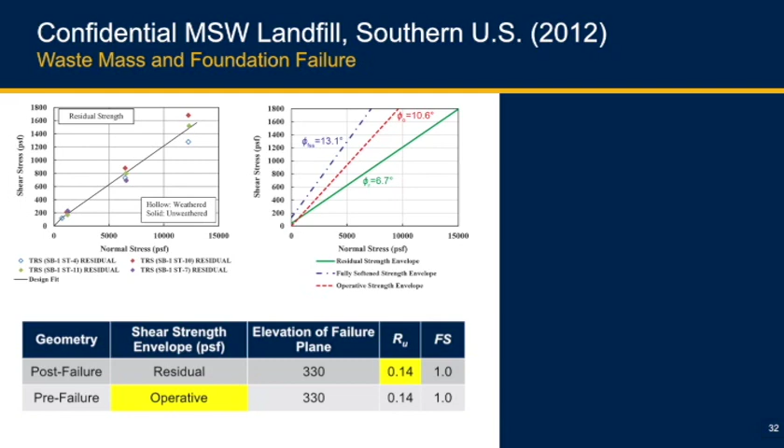So putting all this together, we think what happened here is that the decade-long open excavation allowed ponded water to infiltrate the native clay through desiccation cracks, slickensides, and soil suction due to the unloading and rebound of this highly over-consolidated material. This led to swelling and softening of the clay and fully softened shear strength conditions in this material close to the bottom of the excavation. Remember, it was open over a period of a decade. So you have this material with a shear strength around its fully softened value.

Then you start filling the cell, it has slopes, and you're inducing shear stresses. These shear stresses generated by filling induce deformations in the native clay, leading to progressive strength loss and ultimately failure. So it was a progressive failure of material that was initially softened by the excavation, rebound and swelling, and then shear deformations induced by loading.

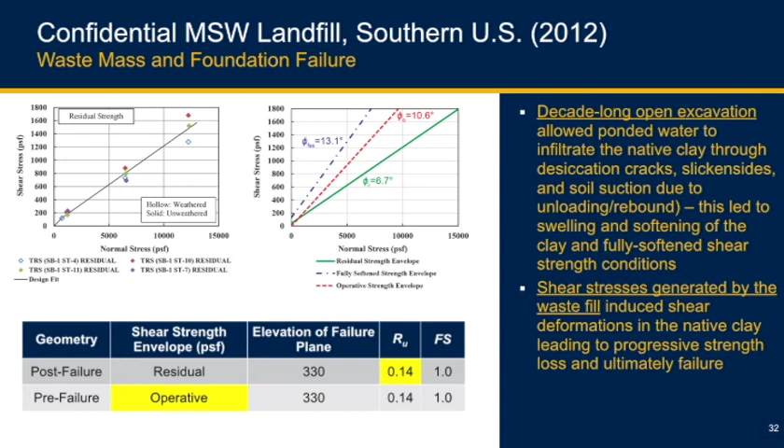So with that, I think the big lesson here is that geotechnical fundamentals matter. This seems like a classical kind of grad school level geotechnical take-home problem to give a student, to see if they would track this through. And the specific lessons with respect to soil behavior are those I just described.

It involved 15 plus acres of waste, and unfortunately, very sadly, resulted in a worker fatality. In the weeks leading up to the failure, surface cracking, slope bulging, leachate seeps, and gas venting were all observed—all indicators that something bad was going on. The owner became aware of this and did their best to investigate, getting contractors out there to start doing things, but it wasn't enough.

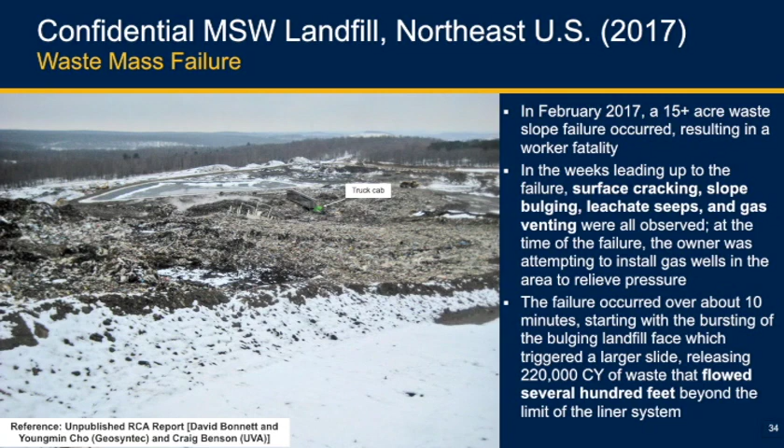The area where the failure occurred involved an expansion of a new waste cell against the intermediate slope cover of an older portion of the landfill. Does that sound familiar? Again, a veneer stability issue. The intermediate cover soil for the original landfill consisted of cuttings from oil and gas production—drilling in this area, think Marcellus Shale type country—that they mixed with lime prior to placing it as cover material. Once it set up and cured, it resulted in a hard, relatively impermeable, and relatively smooth intermediate cover soil layer. Again, as in the previous case study, there was no removal of the layer or installation of a new LCRS.

In addition to the MSW, the landfill accepted a variety of special waste, including a sludge material that was characterized as low shear strength waste. That would get your attention if you're disposing of low shear strength waste.

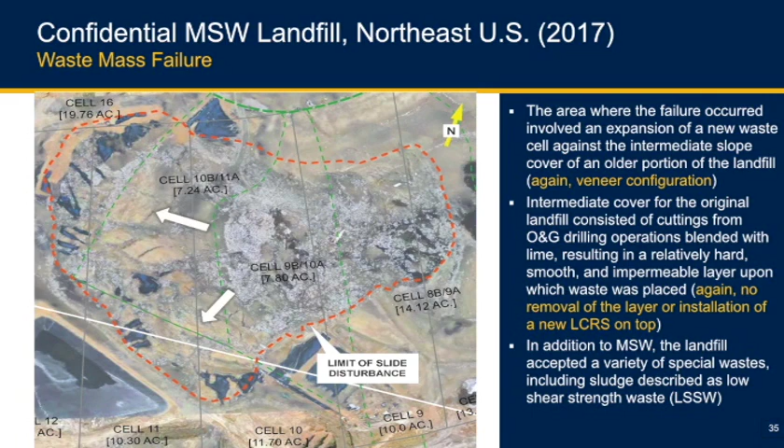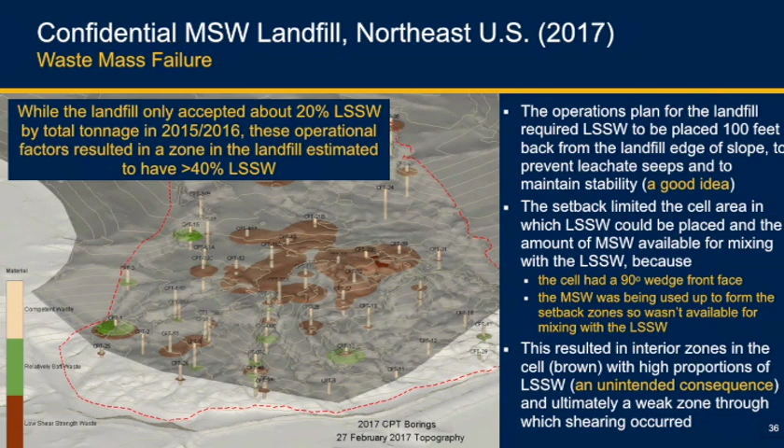This resulted in an interior zone with high LSSW content, and ultimately a weak zone through which shearing occurred. In fact, while the landfill only accepted about 20% of this low shear strength material, in these zones in the back, the dark brown areas, the low shear strength material had concentrations or mass fractions of 40 or 50% or more. That's important because we conducted testing on the material.

Representative samples of these materials were obtained and sent to Colorado State University, where the faculty there have about a 12-inch diameter direct shear box that they use for waste testing.

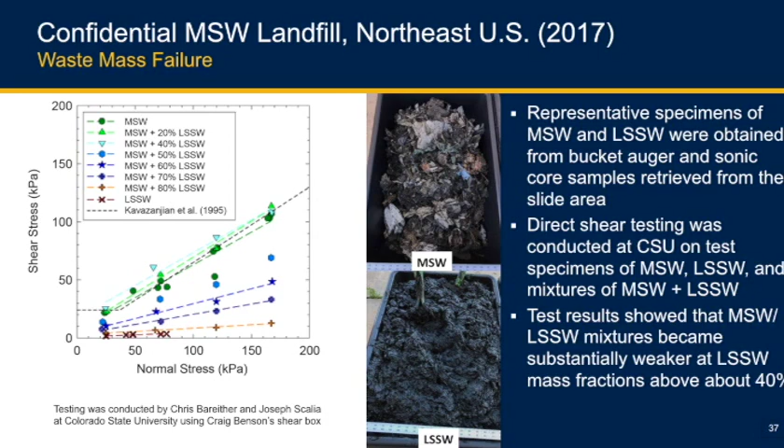The mixture of this low strength material into the waste was one of the root causes for the failure, coupled with the inability to manage leachate and gas levels within the cell.

So the lessons here were that special waste can create operational problems. Procedures developed to mitigate the problems can have unintended consequences. We saw that here. Special waste, if placed at too high a mass fraction and if not thoroughly mixed with MSW or other stronger waste, will create weak zones that adversely affect waste fill stability.

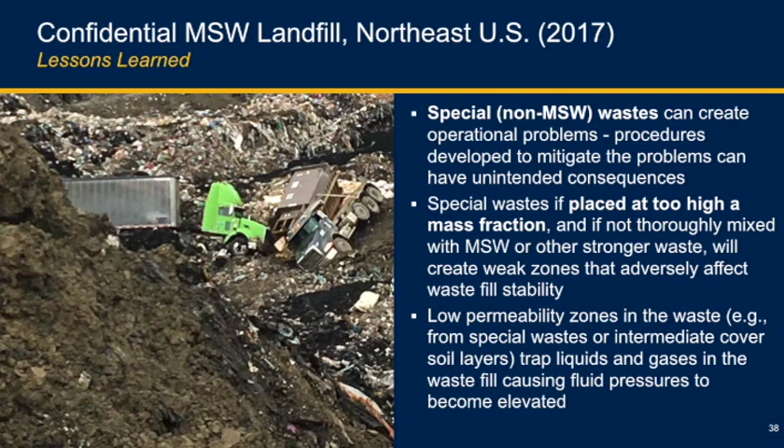And then, once again, low permeability zones in the waste, e.g. from special waste or intermediate cover, trap liquids and gases in the waste fill, causing fluid pressures to become elevated.

So, to wrap up, to bring all this together, what does it mean? First, we are relearning many of the lessons first learned 25 years ago, and this is the same slide from earlier. I think the real question is why?

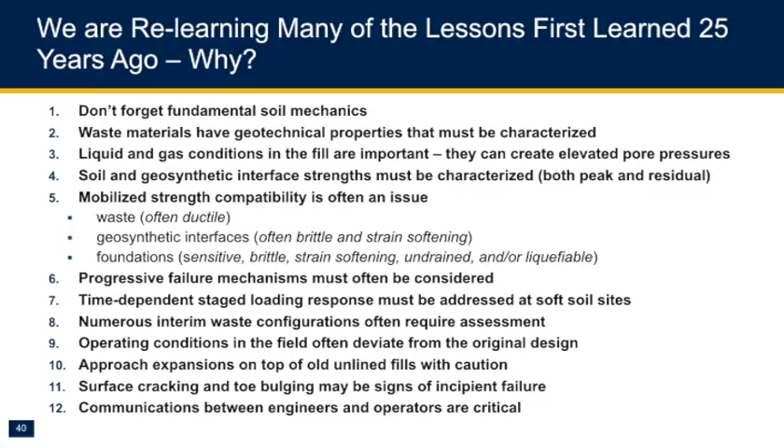Why are we relearning it? Is it that every generation of engineers needs to relearn things for themselves? Is it that the lessons aren't being passed down clearly enough? Is it that owners feel like they've been at this a long time and they don't want to pay for good engineering to be done? I'm not sure, but we're clearly seeing a lot of the same issues that we saw a long time ago.

And then more recent lessons learned. We saw that aggressive leachate recirculation can saturate waste and cause high piezometric levels. Gas well collection efficiency is substantially diminished in very wet landfills. High moisture content landfills can lead to elevated temperatures in some cases.

I didn't talk about this, but this is a big deal in the profession right now. Co-disposal of sludges and special waste can lead to stability and other problems. And vertical expansion configurations and materials have contributed to waste fill failures. We need to be cognizant of those interface conditions.

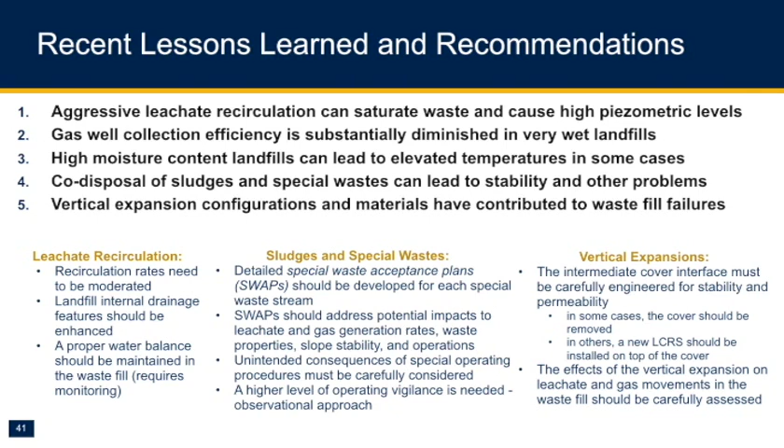I've just submitted a paper to the ASCE journal on this lecture, and in the paper I go into some detail on some of the specific measures that can be entertained or implemented for each of these. I'm not going to go through them here in the interest of time, but they're in the slides that I've provided, and if my paper gets accepted, they'll be in the paper.

And I want to wrap up with this slide, my last slide. I now have great trepidation about showing this slide with Professor Baecher in the audience. I'm not an expert in this area, but I think this is interesting, and I hope the way I'm using this doesn't get too much criticism.

But I'm wrapping up with a comment about the standard of care in engineering practice. The standard of care is a legal standard when you become a professional engineer and you're out practicing in the community that you'll need to meet if you're not going to get sued for negligence in your practice. And the standard of care is doing your work in a way that other engineers working in the same area contemporaneously in the same locale, faced with the same facts and circumstances, would conduct their work. And if you're ever sued, there'll be experts on both sides saying whether you've met the standard of care or not. So it's an important, in professional practice, it's a very important consideration.

I'm going to talk about that in the context of this graph, which I've adapted slightly from a paper by Silva, Lambe, and Marr in 2008, Probability and Risk of Slope Failure, a well-known paper. In it, they used expert judgment and a variety of techniques, some of those Professor Baecher talked about today, to come up with relationships of annual probability of failure versus factor of safety for earth structures, really focused on embankment dams.

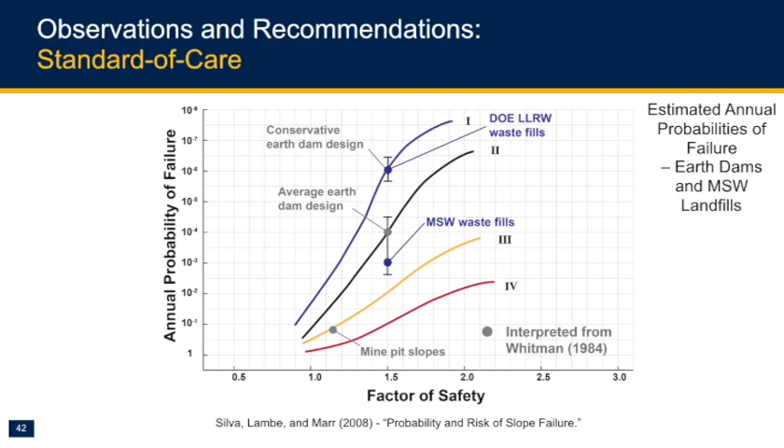So if that's my conclusion, my parting comment is a call to our profession, to the owners of these facilities, and to regulators, for us to work to bring the standard of care in our practice from here up - at least to some degree up towards a level 2 engineering standard. So I'll leave you with that thought.